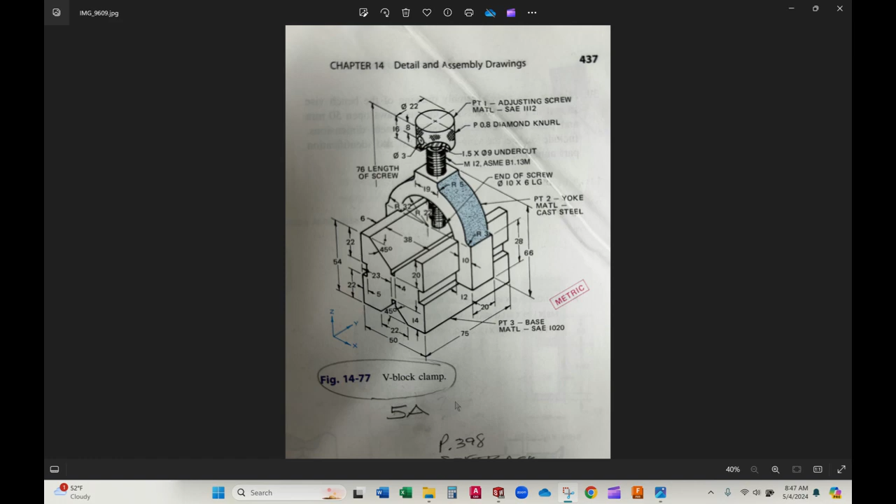We're going to be making this V-block clamp, and we're going to be doing it in metric sizing. Going to start off by making this screw here today. So if you want to screenshot this and get all the measurements, this would be the time to do it.

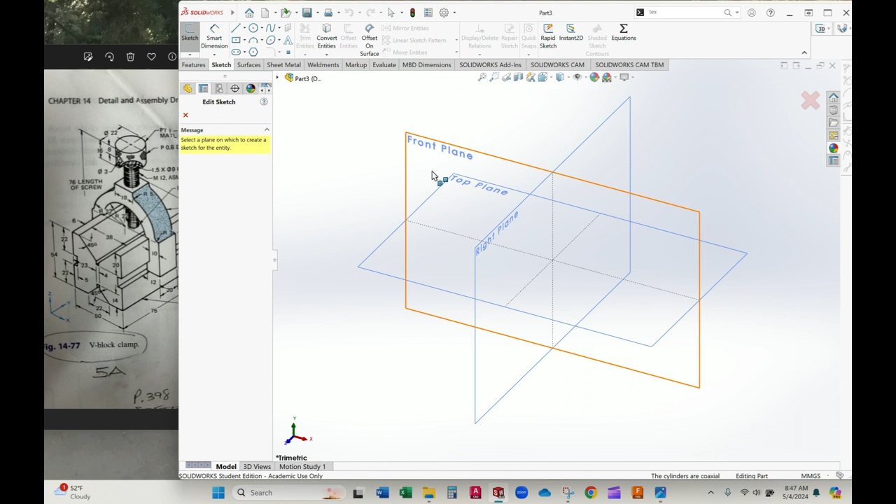I'm going to shrink it off to the side, go into SOLIDWORKS, open up a new document. Once it opens up, I'm going to make sure I am in metric, and get myself a new sketch. Just going to slap this on the front plane, and use my line tool to draw the outline of half of this screw, then I'll revolve it.

So first things first, there's the inner shaft of the screw. It's got a little flat portion at the bottom, comes out for a threaded portion that's most of its length. Got a little undercut, and then the knurled top that we actually grab onto.

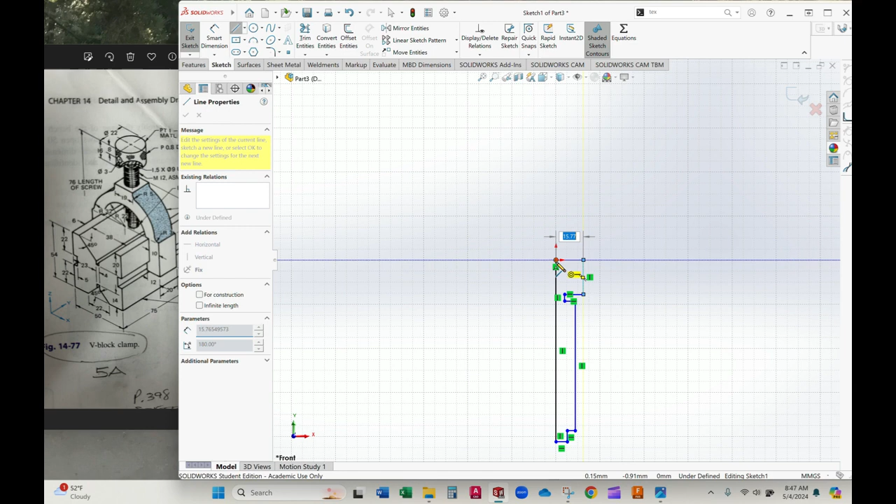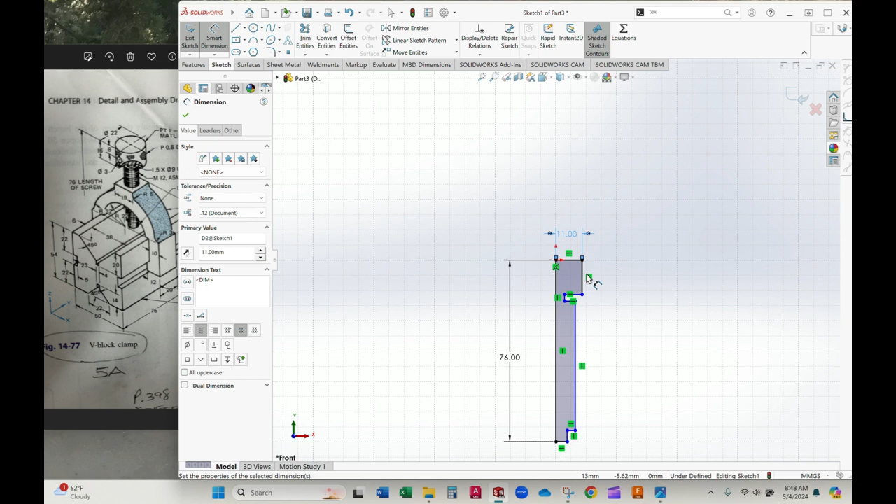Something like that. I'm going to use my smart dimension tool, just slap some dimensions on here. Total length of the screw is 76. The width of this top piece here is 22, so half of that's 11. The length of this top piece is 16. Undercut itself is only 1.5.

I'm not given the length of the threaded portion, but I am given the length of this little guy that pokes out here on the bottom. If I can grab him... try that again, there, I got him. This one down here on the bottom is 6. That's right.

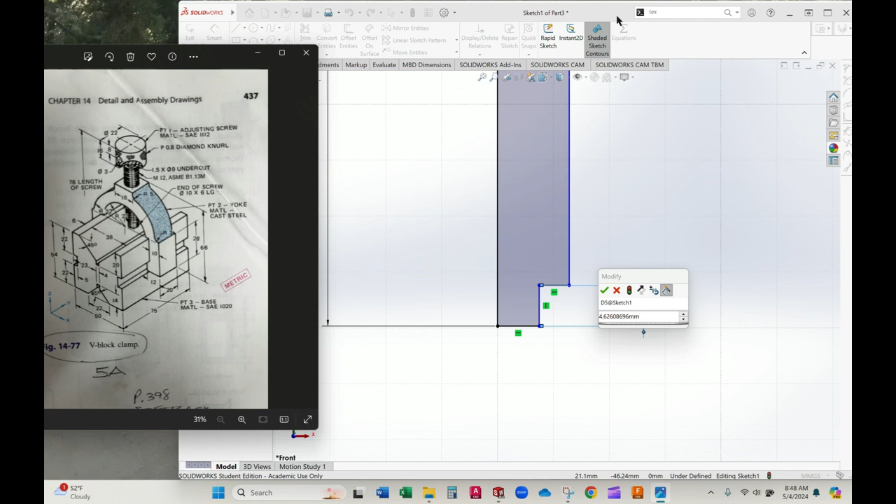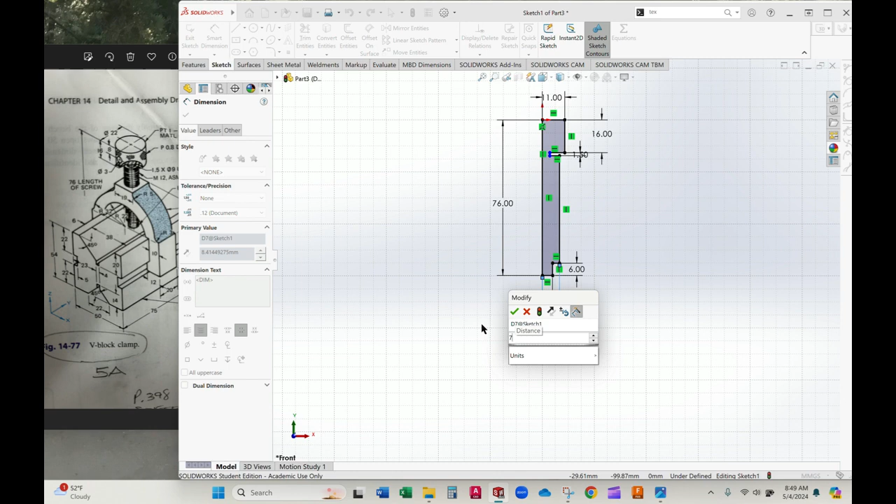There we go, so now I just need to enter in some widths here. That one down on the bottom had a width of 10, so half of that's 5. My thread is an M12 thread, so this is going to be 6, but I'm going to give myself a little bit extra to cut away to actually make the thread. So I'm going to call it 7 for now, knowing we will revisit it shortly. And my little cutaway portion, zoom on in here, has a width of 9, so half of that, 4.5.

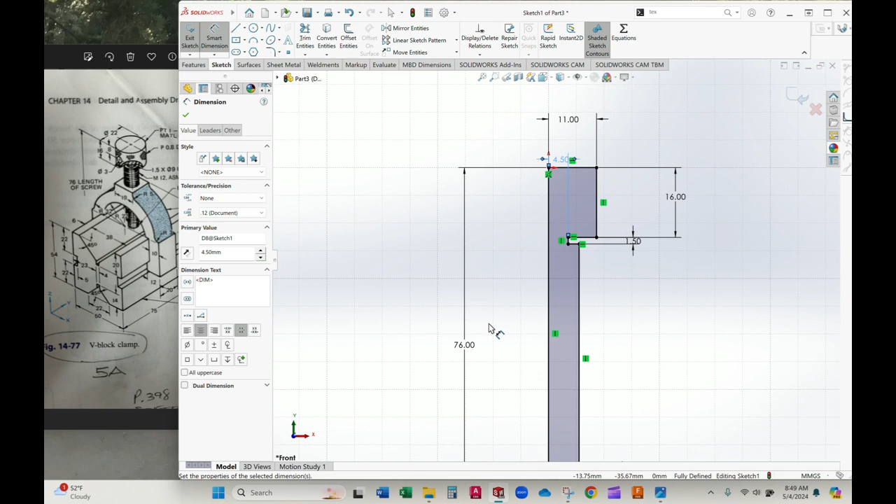All right, now I can turn this into a feature by revolving it. And there we go. Now I'm going to come back to those threads.

I left this oversized, so I'm going to come up under my hole wizard. I have what's called a stud wizard. It's asking me to start this on an edge of a cylindrical surface, so I'll start it right here. And it's going to be putting threads on this surface.

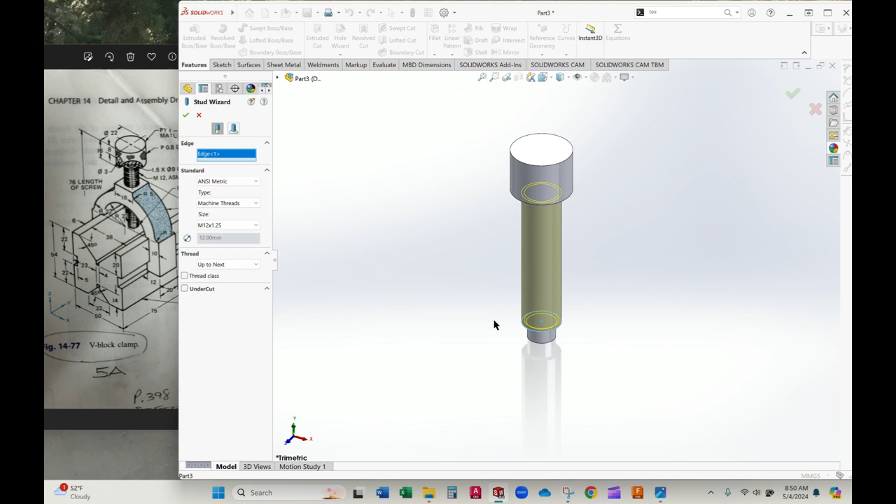Now we're not in inch, we're in metric, and I got some options here for 12. This 12, 1.25 is about as close as I can get to the spec that's called out, so I'll run with that for now. And my threads, I want them to go up to the next surface, so just running that whole thing. And there we go, that cut it down to size. You can see this dotted line indicates that there's going to be threads here, so the shop knows there's supposed to be threads.

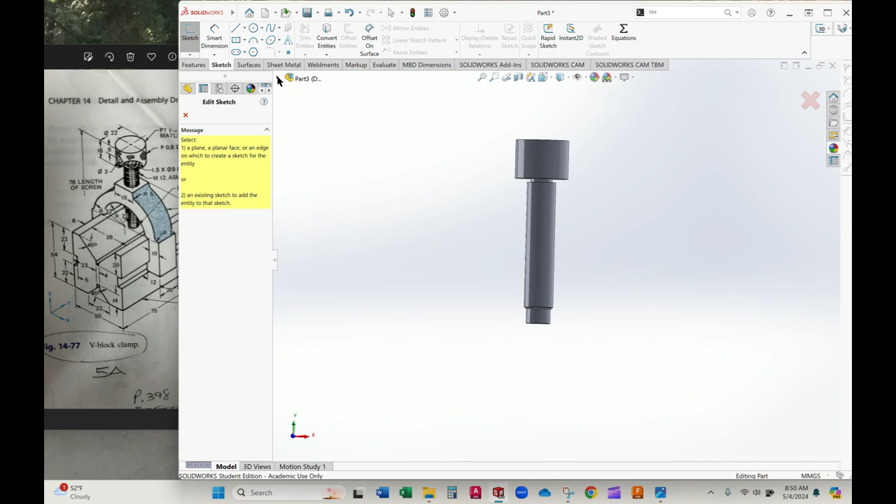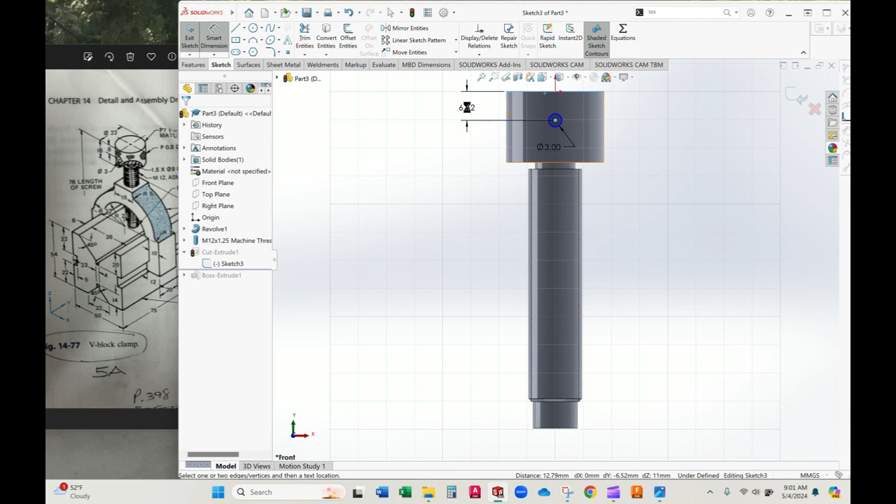Okay, next thing I'm going to put on here, I got this little hole here, this little pin that goes through. So to make that, I'm going to make myself a sketch, and use this drop down to get access to my front plane. And this is literally just a circle, 3 millimeters, dimensioned halfway down this knurled area at 8.

Very nice, so I will turn that into a cut. Got to cut a hole first, and then I'll fill it with the pin. I'm going to do through both directions. There we go, now I got a nice hole running through there.

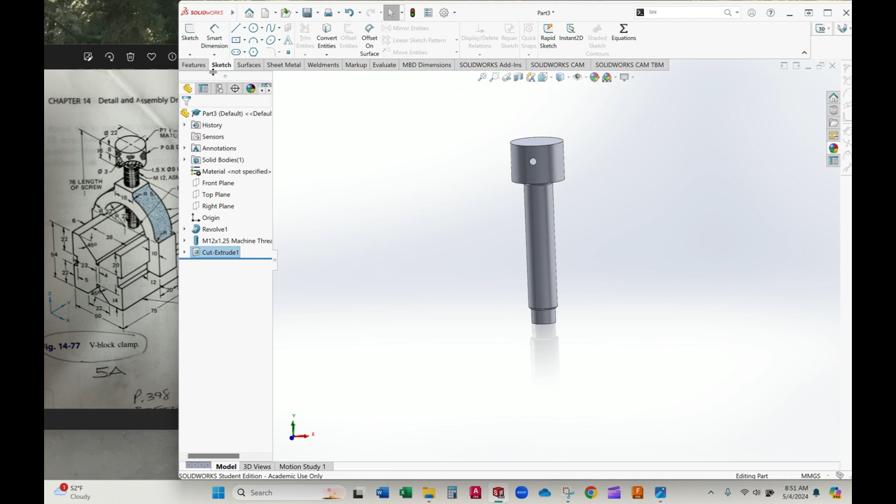Now I just got to put a pin in there. That's once again just going to be a new sketch on that exact same front plane. I'm going to convert entities, grab that circle, and then turn it into an extrusion.

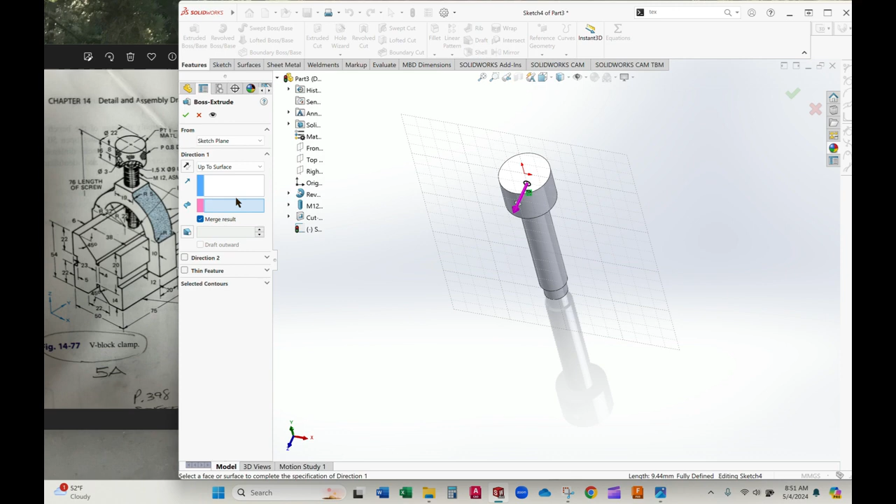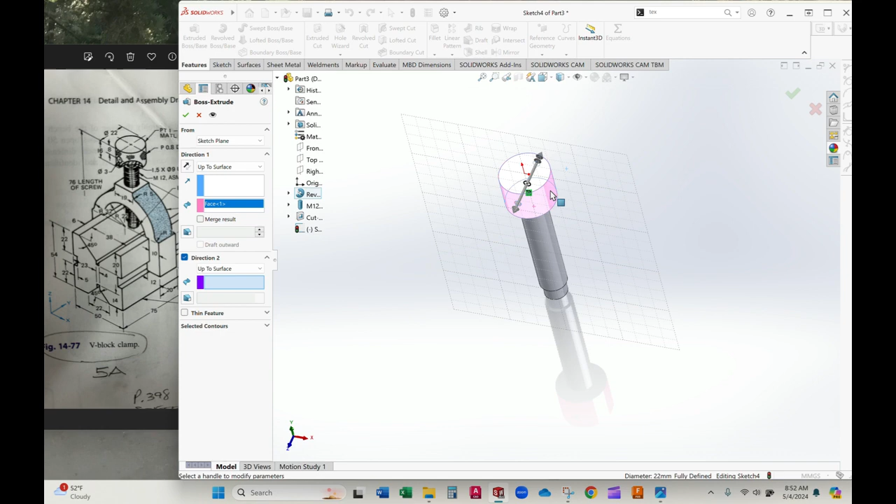So for this one, I want it to go up to the surface. That's like, all right, what surface? That surface. I do not want it to merge result because I want it to actually stand out so I can still see it. So currently I'm heading from the center up to this surface. Well, that's only half of it, so I need a second direction. And it's going to be again up to the surface, the exact same surface, just on the other side. There we go, so I've now filled that hole in with my little pin.

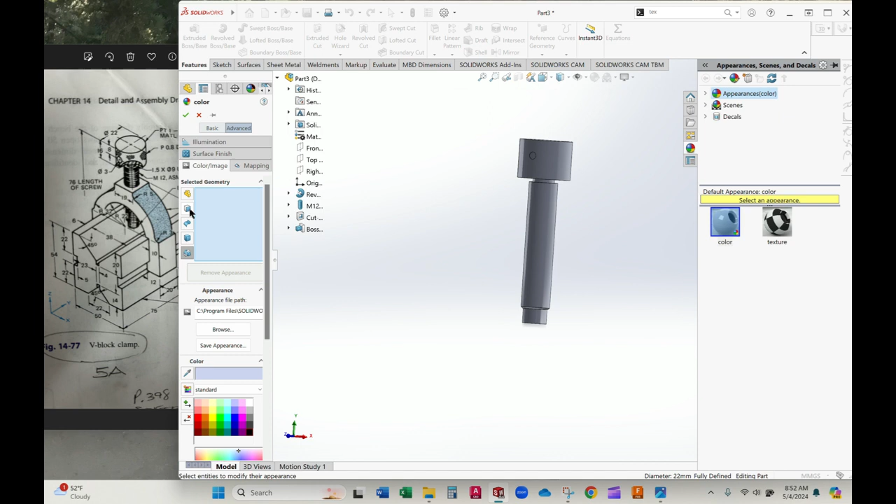Only thing left to do in the picture, we have a knurling on the surface. So an easy way to do those, come up here under my appearance menu - and it's already grabbed the Boss Extrude, this little pin. That's not what I want, so I'm going to highlight it and delete it. I am going to be knurling a surface or face, it's this one right here. And then I'll go under my advanced options, and surface finish is one of your options. I'm not putting a color on it, I am knurling it. Now all I got to do is zoom in here, grab this little box.

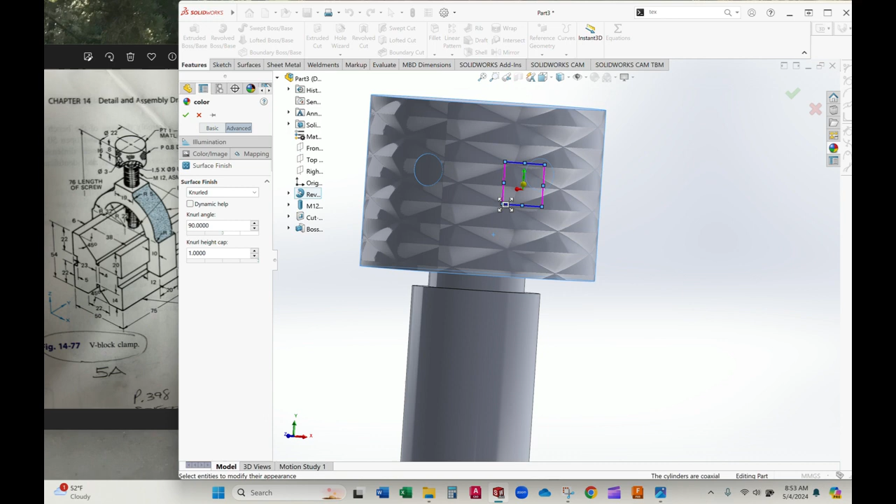See if it'll let me grab one of these corners. There we go, like that. And now I can shrink the size of my knurling, expand it, sort of play around with it until it looks right. That looks like a nicely knurled surface to me.

And there we go, we have ourselves a nice little pin that's ready to go in our V-block.